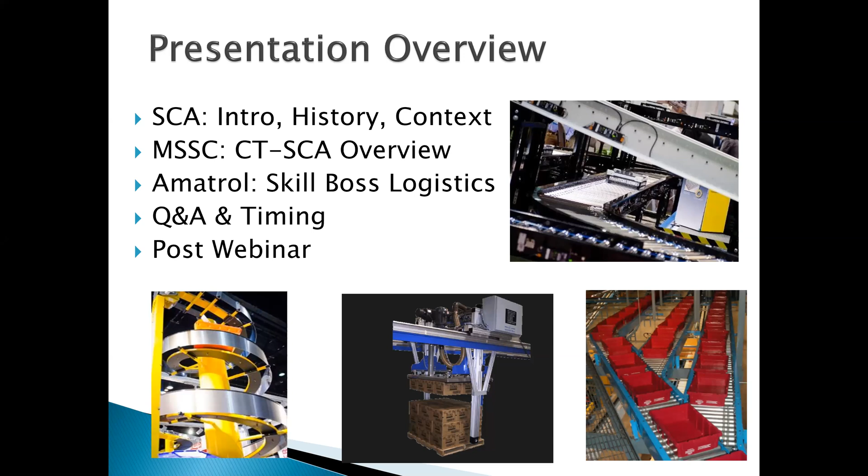We are funded by the National Science Foundation under STEM. We have partner schools nationally. Our role is to develop resources, and we seek industry's input in developing all of those resources. And because we are NSF funded, what we develop and what we have posted on our website is no cost to anybody that has an interest. We have a strong and robust industry leadership team who helps guide and drive our mission as we go forward. And we are not involved in student education. Schools are involved in student education, and some of our partners are, but it is not something that we do.

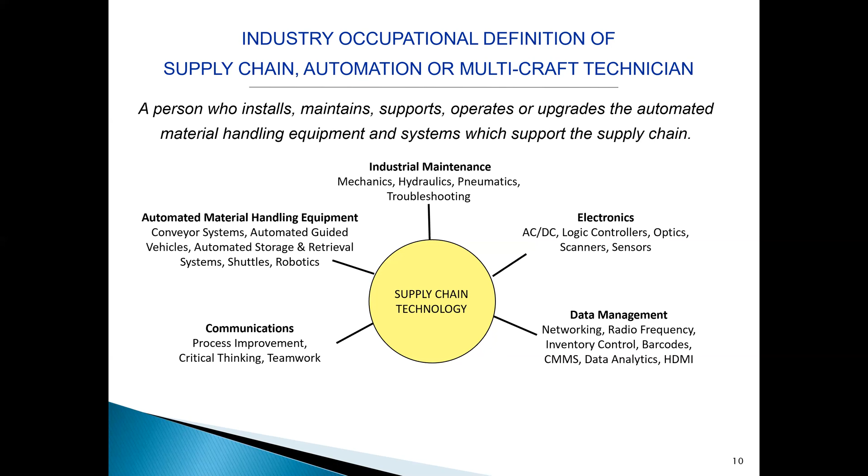And I think the most important aspect of this particular slide is to show you all of the skills that are needed by somebody who works in today's modern supply chain in the 21st century warehouse. It's the intersection of traditional industrial mechanics with information technology. I think the field of mechatronics is a good way to describe it, which is mechanical, electrical, and computerized motor controls. At any rate, it gives you a feel for the challenges that abound in getting a technician skilled to work in today's supply chain.

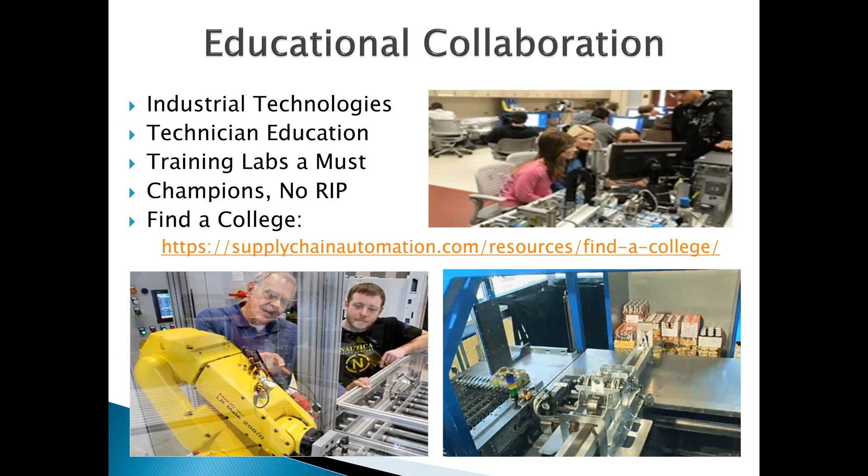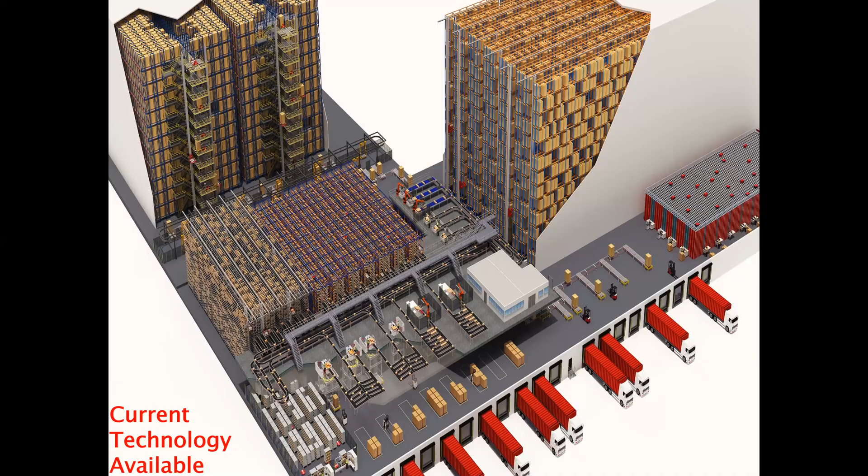This is a slide that Swisslog shared with us, and it gives you a feel for what's going on in today's automated 21st century warehouse. As you drive along the highway, you might see that big building on your right. Looks pretty plain on the outside. You have no idea what's going on inside those big logistics buildings. This is a sample of many of the technologies that are involved, everything from shuttle systems to AGV cranes, ASRS systems, goods-to-person systems, and things of that nature.

The investment inside one of these buildings can be anywhere from a low end of $5 million up to a high end of $200 million in automated equipment and systems. So our role in the development of certification: we did some initial research, and there was a gap identified that there was no nationally industry validated certification that was nationally portable and ANSI ISO accredited in this space.

We shared that with our partners, and through that process, an MOU was developed between MSSC and MHI for the initial development stages. The National Center's role was to be a convener of industry experts. We played that role, gathered all of that data, and then sent that on to MSSC for their development of first the draft, then the actual finalized industry validated skill standards. The people involved in our initial research were large consumer good retailers, package shippers, people who handle the boxes, and of course the automated system suppliers.

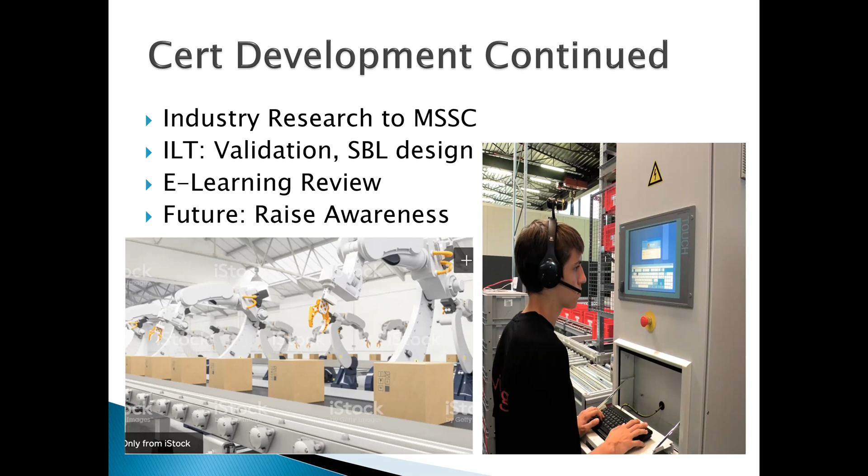And that was a forecast growing into this year, but what happened was COVID. And COVID has rocked the world, as we all know. What's going on is there's a tsunami of e-commerce occurring. According to UBS, an international banking and financial services firm, 25% of all US retail spending will be online by 2025, which will force about 100,000 bricks and mortar stores in the US to close.

And as those stores close, you estimate about 20,000 a year. The trend going into this year had been 7,000 or 8,000 a year. In 2019, 12,000 stores closed. But this is really a tipping point for the bricks and mortar world. And all of that business is moving online into today's automated 21st century warehouses.

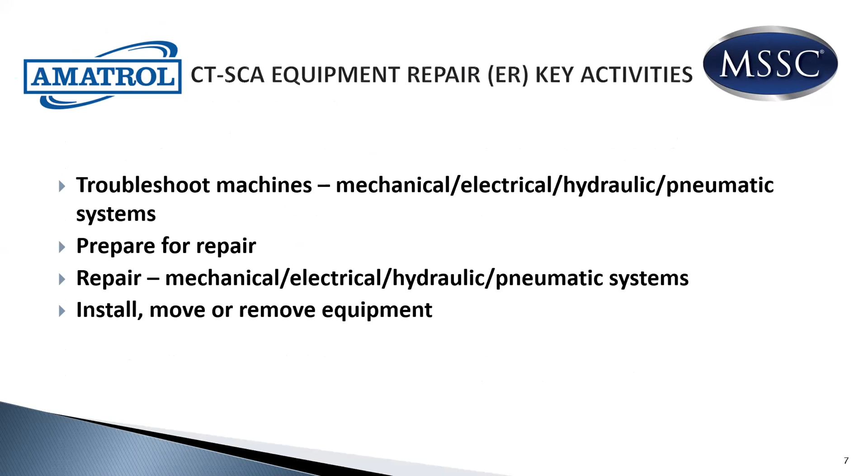Here's a kind of a snapshot of the key activities of each of these. And I don't need to read all of these out to you out loud, but I'll put them up here just for a few minutes. And then of course you'll have access to this presentation as well. Equipment repair, key activities: troubleshoot machines, repair mechanical, electrical, install, move, or remove equipment. And Paul Perkins will be going in more detail on these. Again, network repair: install and maintain PLCs and PLC modules.

So how are these certifications comprised? How are they made up, if you will? What is the model? So each of the 3 certifications that I've mentioned first requires an e-learning component with wonderful e-learning material developed by Amatrol. It also requires interacting, and this is really project-based learning at its most fantastic form, in the sense that the e-learning is interacting with the SkillBoss logistics device, which Paul will be describing here. And project-based learning is one of the strongest ways to learn. And so it's a combination of both e-learning and hands-on skills on the SkillBoss logistics device. You must have both the e-learning and the SkillBoss logistics device to put anyone through any of these 3 certifications.

So in terms of the assessment process, there are 2 assessments involved in earning each of these certifications. One is a 90 to 120-minute written assessment online based on the e-learning. And the second is a hands-on performance-based assessment using the Amatrol SkillBoss logistics device.

Now, we also will have CTSCA instructor training. Master training sessions will be held at Amatrol. What we're hoping is to have the master trainers go back to their different sections or regions in the country, and at a local level be able to provide instructor training to the CTSCA instructors in their region. So hopefully building a local network of instructors throughout the country.

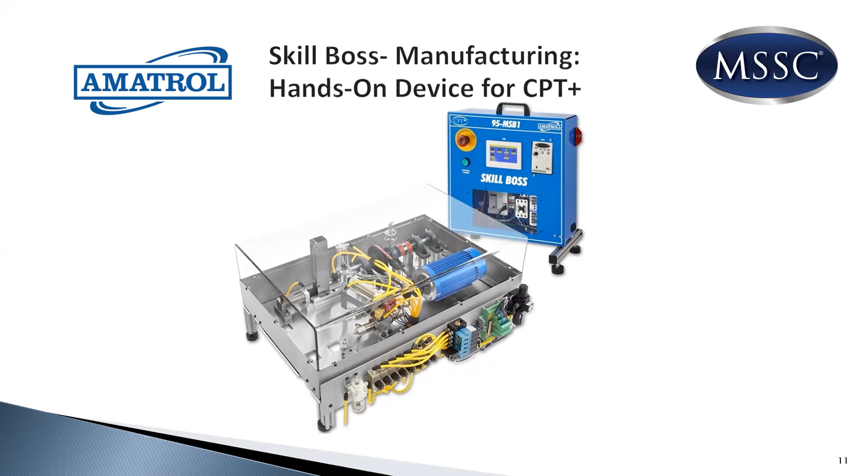So our students can not only get excited in a classroom environment about these career paths, but it prepares them for much higher level learning to go on to, let's say, get an AS degree in mechatronics or welding or machining and build on their career path. But really what we're doing so well with both the SkillBoss Logistics program and CTSCA is we're preparing people for success in these career paths, and really the very beginning of a career path that can go on to higher and higher levels.

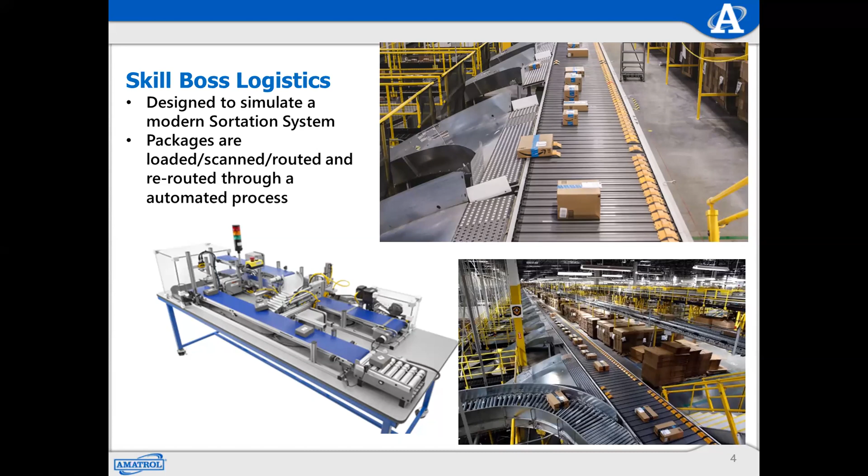The skills that the students learn on SkillBoss are aligned with 3 CTSCA certification tests, which Neil listed here shortly before. And to learn the skills, we've developed 3 online courses. And as you see here, the courses are titled the same as the certifications. Course 1 is equipment maintenance. Course 2 is equipment repair. Course 3 is network repair.

So these courses not only prepare individuals for the CTSCA hands-on assessments, they actually prepare them for the online certification test. And each course is about 150 hours, which includes the time to learn the multimedia content and also to do the hands-on skills on SkillBoss.

The courses have also been designed to specifically focus on the technology of supply chain automation. And this means students can go through these courses faster than if they were taking traditional maintenance courses that are being offered by many colleges across the country today, which might have similar content, but they cover more than what's needed for the supply chain industry. And I think this feature makes these courses ideal for workforce development and in-plant training, where the learning time is critical.

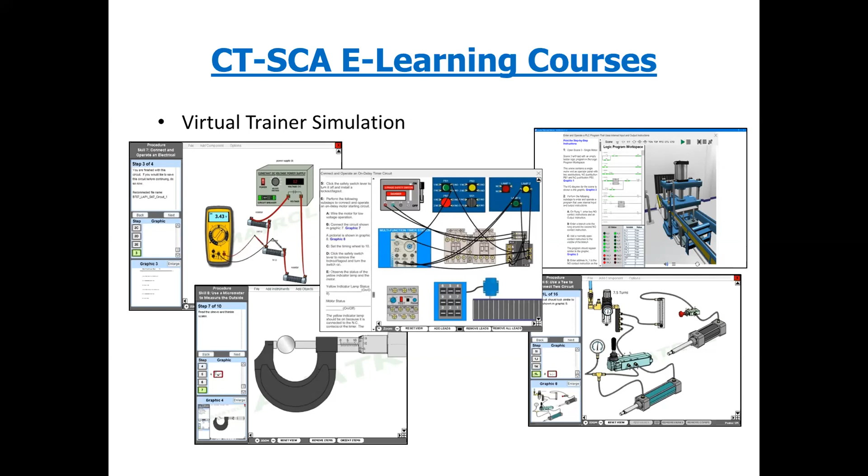So we've developed approximately 100 skills that align with the CTSCA certification that we can perform on SkillBoss. They're organized into the 3 groups that align with the 3 online courses, which align with the 3 certifications. So in course 1, individuals practice skills such as system operation, safety, preventive maintenance, lubrication, and machine adjustments. Those are all the entry-level skills that somebody would perform if they're coming into an entry-level maintenance type of job.

In course 2, they start to learn about installation and troubleshooting, focusing on the electromechanical devices, which include things such as fluid power, DC and AC motors, mechanical power transmission. And then finally, course 3 is the capstone, and it really is the companion to course 2 because there they add learning of installation and troubleshooting of controllers, networks, scanners, and really work with the entire system.

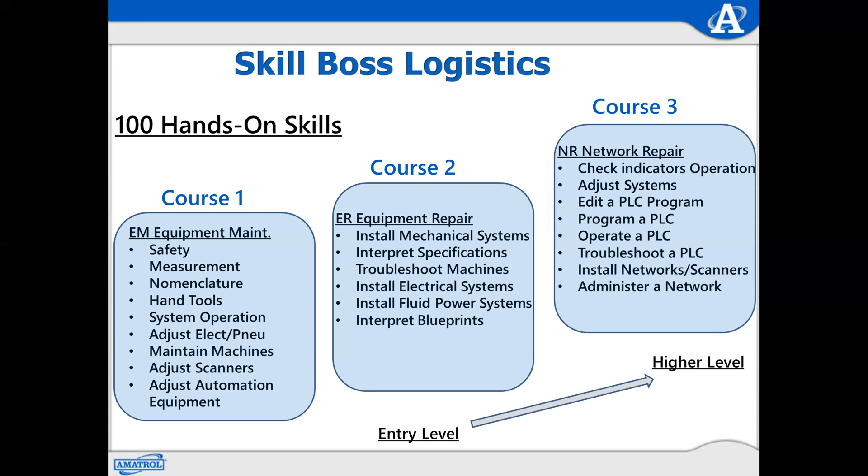The components of SkillBoss are contained in 3 major elements that you see here. There's an HMI, which runs warehouse control software, which people in the industry call a WCS. There's a control unit with a PLC, Ethernet network, and a variable frequency drive, as well as other electromechanical components. And finally, the workstation itself, which includes multiple types of conveyors, sensors, actuators, and a barcode scanner. So all these elements work together to recreate a sortation system just as you would find in a distribution center.

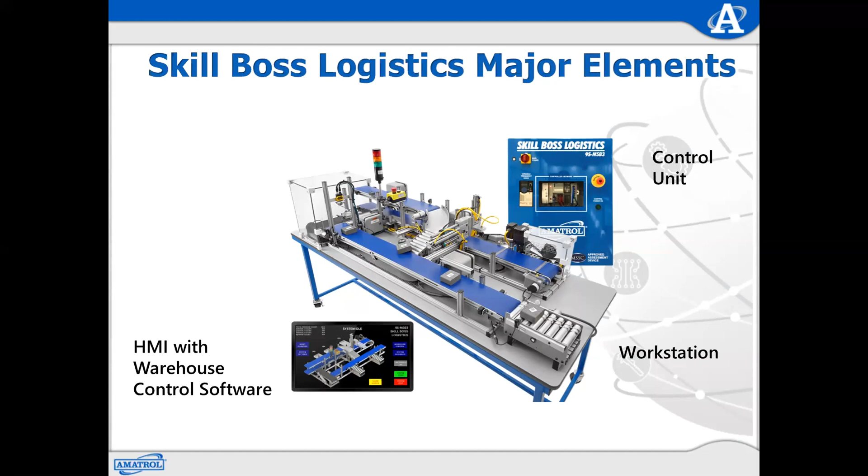Packages are then transported to a second conveyor called an induction belt conveyor, and its function is to actually pass the packages through a 2D barcode reader. If the package scan is bad, there's a vertical sorter conveyor located just to the left of the induction belt conveyor, and it actually lifts up and passes the package to a recirculation conveyor located on an upper level.

Packages on the recirculation conveyor stop at a rework station where a problem can be corrected, and then the package is released and it's passed to a gravity slide, and it slides back down, rejoins the induction belt conveyor, and goes back through the barcode scanner again.

If the package scan is good, the vertical sorter remains horizontal and passes the package to the distribution conveyor on the lower level of the system. To track packages along the distribution conveyor, the PLC uses an encoder. This is used to determine when to shunt each package into one of the 3 discharge chutes.

The distribution conveyor has 3 types of diverters which shunt the packages into the chutes. There's a pusher, there's a bow arm sorter, and there's a 2-axis pick and place manipulator. So these are 3 of a number of types of diverters that are used in industry today.

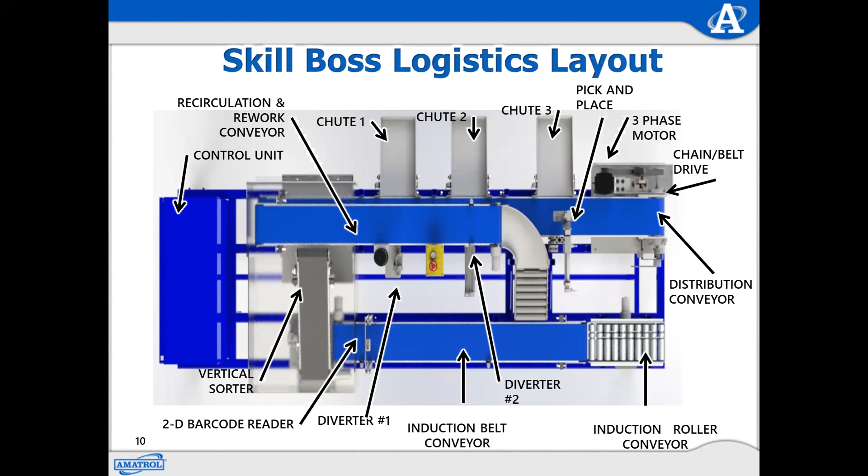So now that I've described the overall operation, let's watch a short video so you can actually see the device in action. And before I start the video, let me point out a couple of things. First of all, you'll see on the screen that there are two PC screens. There's one on the left that shows a Fault Pro screen. That's actually a fault insertion software that we've developed that inserts faults into the system to teach troubleshooting. And I'll talk more about that a little later.

And then on the right screen, you'll see a 3D picture of the workstation. And that is actually one of the screens from the warehouse control software that actually controls the system. And then finally, you'll notice over on the left-hand side, the control unit. And it's a standard industry enclosure with lockout tagout.

It's got a disconnect switch, has a control start stop, and other safety devices that are typical of what you find in industry. So we've tried to create a system that looks and feels as much like what people are going to see when they actually go out on the job.

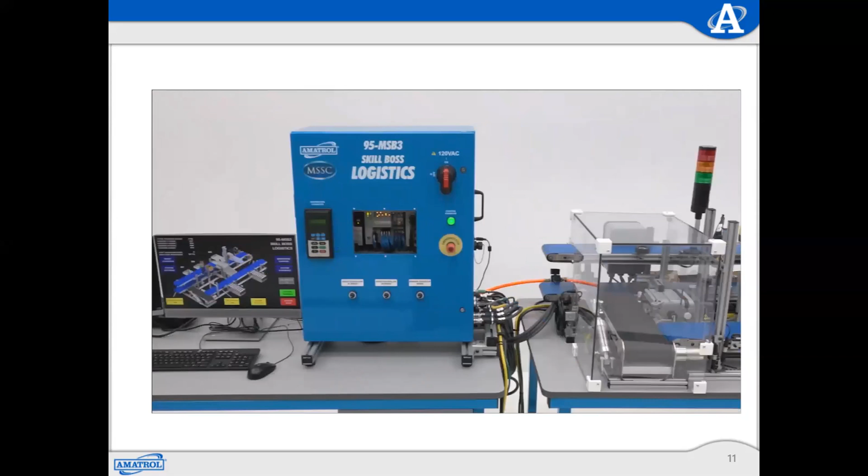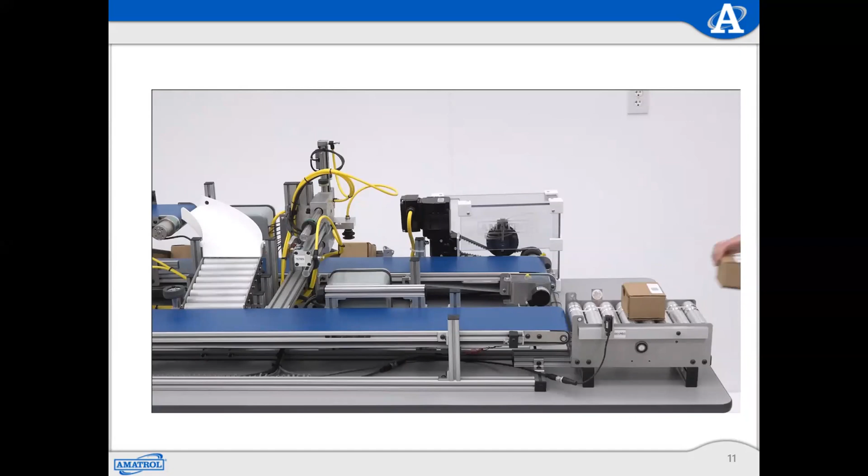So let's play the video, and as you'll see it panning across, you'll see a few guards. Each of these guards has a safety switch on it so that if it's removed, the system stops, just like you'd find in industry. And then we're going to start over here on the right, and you'll see packages being placed on the induction roller conveyor, and you can see the gap being set.

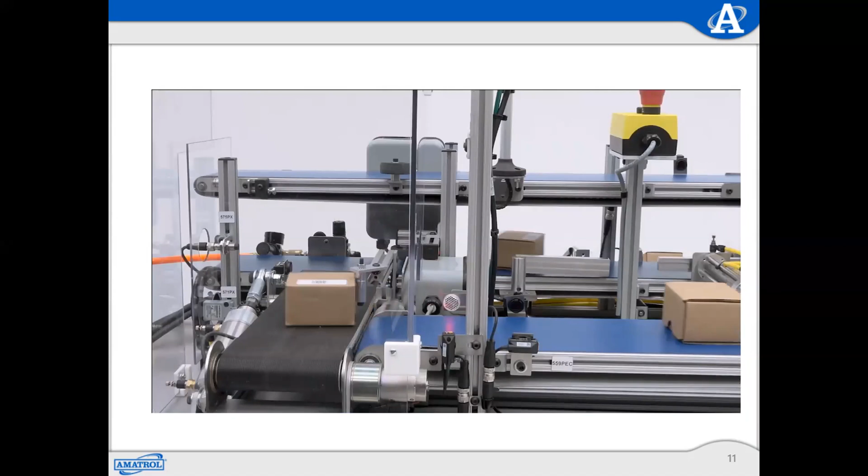They're now going down the belt conveyor, being scanned by the barcode reader. If it's a good scan, they stay on the vertical sorter conveyor and get passed to the conveyor on the back, which is the distribution conveyor. If it's a bad scan, it goes up to the recirculation conveyor and then comes over, gets stopped at a rework station. In this case, it's a barcode label that was flipped over. So it was replaced or fixed and then operated, and I'm going to stop the video for just a second.

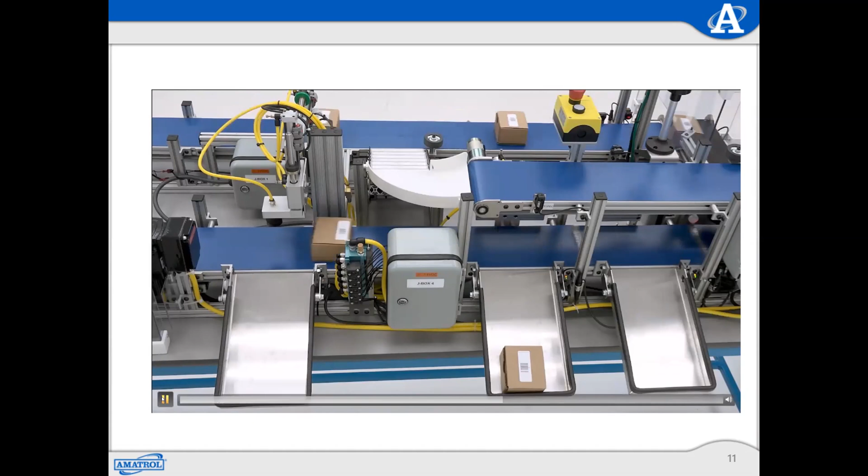And so the gravity slide allows the boxes or packages to rejoin the induction belt conveyor, get rescanned, and then if they're good scans, they come over on the conveyor that you're seeing here, and you can see 3 chutes, and each of the chutes has a different type of sorter or diverter that I mentioned. And what we're seeing is the actual operation of those various diverters. So this is the 2-axis pick and place, and the one on the right was the bow arm sorter.

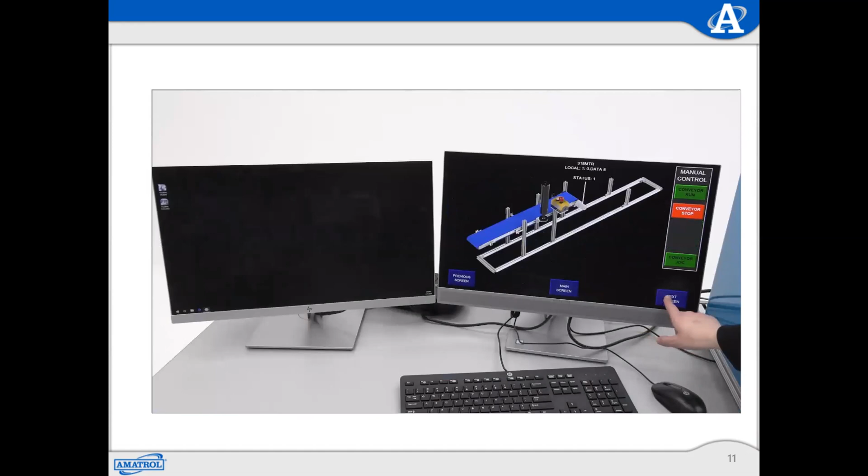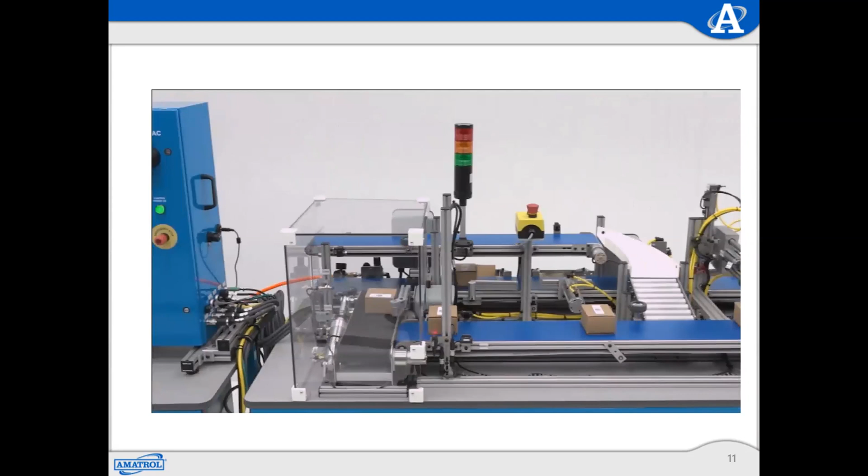Now we're seeing somebody navigate through some of the screens of the warehouse control software. You can see it's a touch screen display, so it's very easy to use. And then they operated the Fault Pro software, and that's where they would go into a troubleshooting exercise. So the system, I think, is really easy to use, but the learning that it provides is truly extensive.

So if you examine SkillBoss up close, you'll notice that it has a wide array of components. And as I mentioned earlier, the purpose is to make sure that individuals are being exposed to as many different components as they're going to see on any kind of device that they might find in supply chain automation.

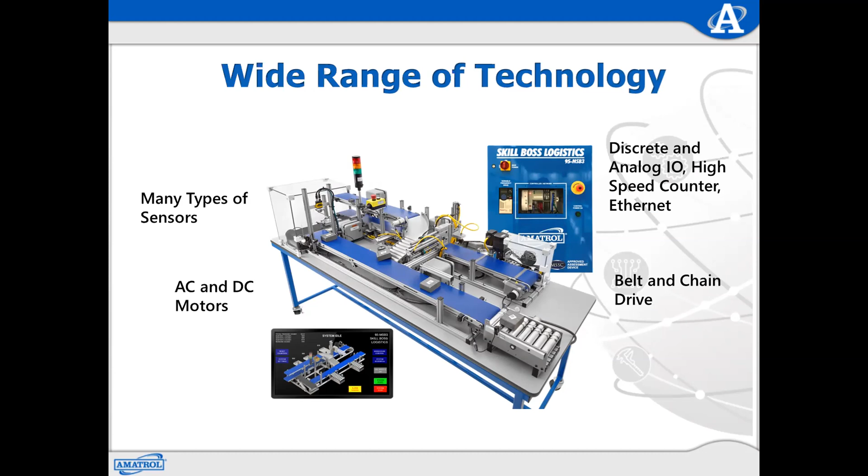In the mechanical area, we have different types of bearings, belts, chains, a variety of mechanical components that they're going to see when they go out into any type of distribution center. And as I mentioned previously, the warehouse control software, these are some examples of screens of what it has, and it is capable of monitoring and controlling the entire system.

And we actually developed this in-house because they're generally matched to the specific system they're used for. But we looked at a lot of different systems across the country with the help of our industry advisors and actually developed a software that is a combination of warehouse management software, warehouse control software, and conveyor control software. And actually all 3 of these are often used in distribution centers to control the entire system. And so it's really a very, very powerful system with alarms and order entry and many different types of operations.

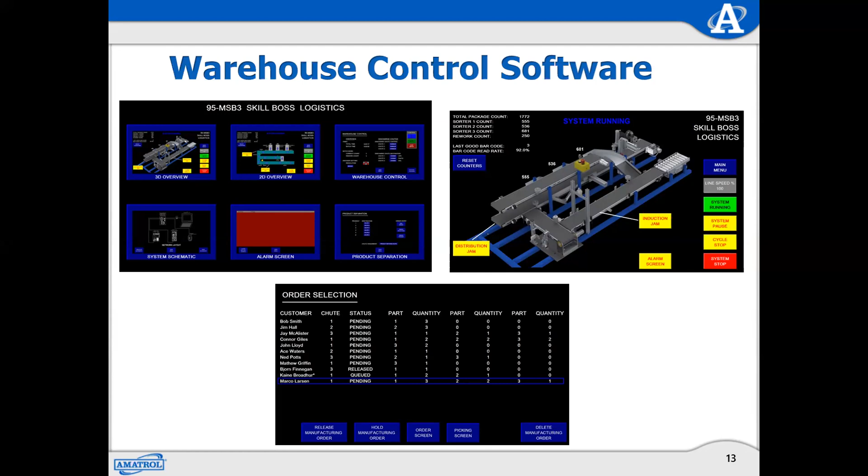So up to this point, I've shown you the elements of SkillBoss that make it operate. What I'd like to do now is talk about the part of the system that's designed to make it not operate. And this is actually the most important feature of the system because it enables individuals to learn and assess their troubleshooting skills. To accomplish this objective, we've used a computer-based fault insertion system called FaultPro. And FaultPro consists of an electronic circuit board and software that inserts faults into the system, and it tracks the student's troubleshooting activity.

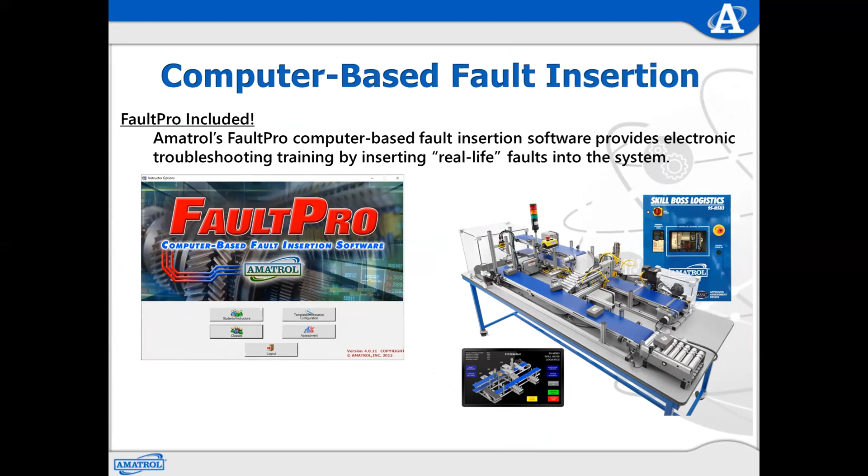Students don't know what the fault is that's been inserted by the computer, so they have to use a troubleshooting methodology, starting with symptom identification to isolate the problem to the specific fault. And in this random fault mode, the FaultPro software tracks the troubleshooting process, including the number of correct and incorrect answers and time to solve.

So using a computerized method of inserting faults like this has a lot of benefits. One, and most obvious, is that you're solving real-world problems, that you're getting a rich troubleshooting experience where the students are doing it firsthand. They're not just having a teacher demonstrate a few examples. Second advantage, I think, is that it's safe. We've designed it so that it won't hurt the student and it won't hurt the equipment. And a lot of times when people put faults into systems, they easily tear up wiring or do something that creates more problems than they were expecting.

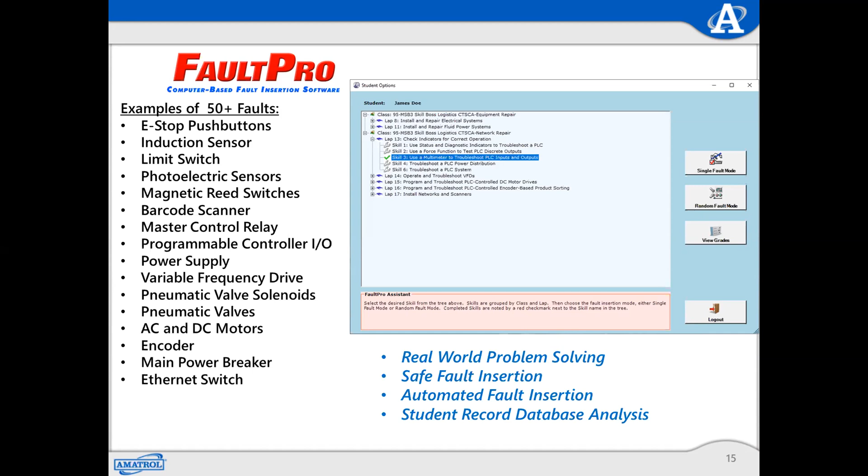So as you might expect, teachers have much to learn to teach and certify individuals in the CTSCA certifications and SkillBoss. To make it a success, we've developed a master teacher training course. And as Neil mentioned earlier, it's initially going to be held at Amatrol in Indiana starting in the fall, but the goal is to get it pushed out into the various regions. And the course is going to be designed to teach teachers how to implement the certification, how to work with the online courses, and to become thoroughly familiar with the SkillBoss logistics device.

It's a week-long course with pre-work using the online courses, with the goal that they can come to class already being able to focus on the hands-on part of the training, which is the one thing that they can't do anywhere else. So that's what I have to share about SkillBoss Logistics.